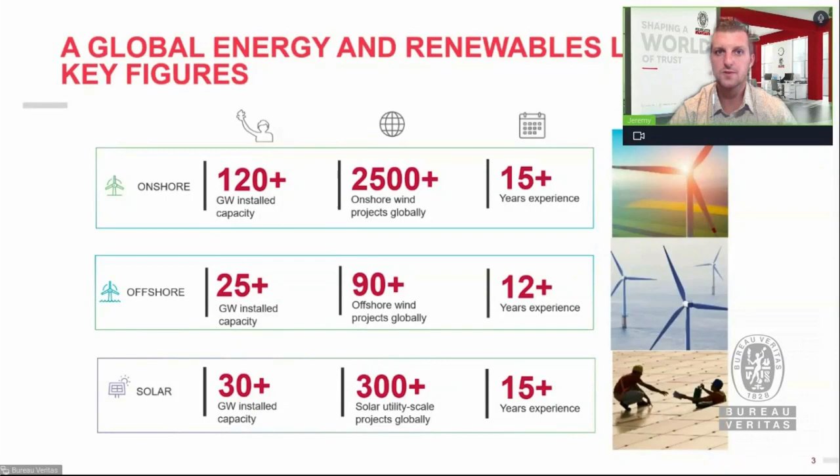As you'll see, we have quite a network of expertise throughout Bureau Veritas within our global reach. The offices supporting the scope we talk of today are located in Houston, but we have a variety of areas that we support and service lines throughout the world, which gives us strength to support projects throughout their life cycle and development across the world.

Regarding the services Bureau Veritas can assist with, we work anywhere from the CapEx side all the way to the OpEx side, which we'll talk about today more, specifically with development support, things like owner engineering, reviewing design on projects, all the way through construction management, overseeing the construction and capital build out of these large projects. We also have a certification group that supports product certification and project certification, along with asset operation and asset management, which today is the main topic that we're going to talk about, supporting optimization of assets that are already in existence.

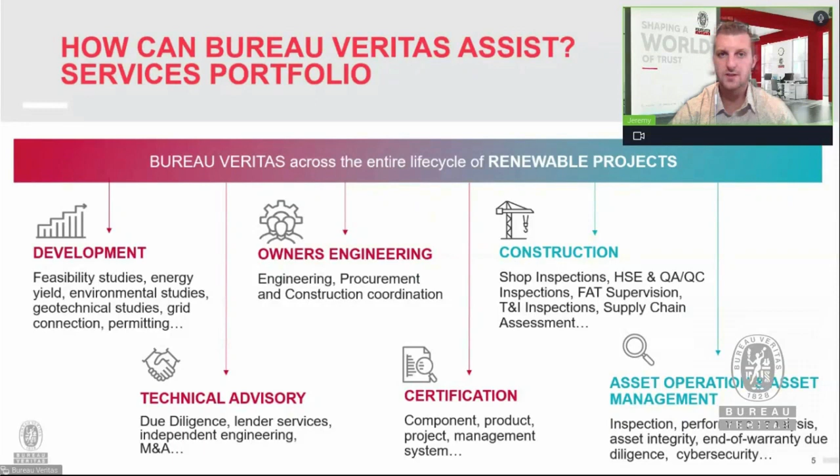So as we jump into the content today, on the agenda we're going to look through 5 different sections. The first section is going to be looking at specific gearbox oil for the wind turbines that are currently deployed in the global reach. We're going to secondarily look at the modes of degradation and then the analytical tools that will help us understand those modes of degradation, and then really drive into some case studies that are specific to these topics, and then come upon some conclusions and have some time for Q&A.

At this point, I'd like to introduce our global expert for our OCM group, which is for oil analysis, which looks after over 20,000 different wind turbines throughout the world. I want to introduce and kick off the topic of technical nature with Jorge Alarcon, and he'll be leading the discussion from here.

Thank you very much, Jeremy. So I've been involved with oil analysis and lubrication in wind turbines since 2008. I saw the transition that the industry had, especially in the size of the turbines and the gearboxes, and also the different types of oils and lubricants that this industry has been using through the years.

There's a large difference between what we were doing when we started oil analysis back in the early 2000s compared to what we're doing right now. Right now we have tons of data, a lot of information, and we've gained a lot of knowledge through that time. So what we're trying to do is not only increase that knowledge, but at the same time offer that expertise to our customers.

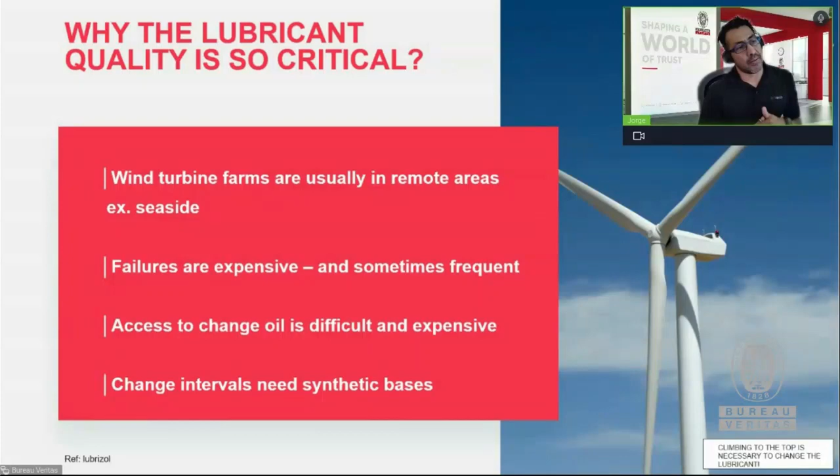So when we talk about gearbox oil, we're talking about very developed technology that we are using in the gearboxes right now. It contains many different types of properties that are trying to basically extend the life and service of the gearbox. If we go back to the initial years of the wind industry...

...the gearbox oil used to be changed every year, and for some reason we started seeing that change a lot over the years. Now we have seen sites that are using the same oil for about almost 18 years in some cases. So we are talking about a technology that has developed through the years at the same time as the power increasing on the turbines.

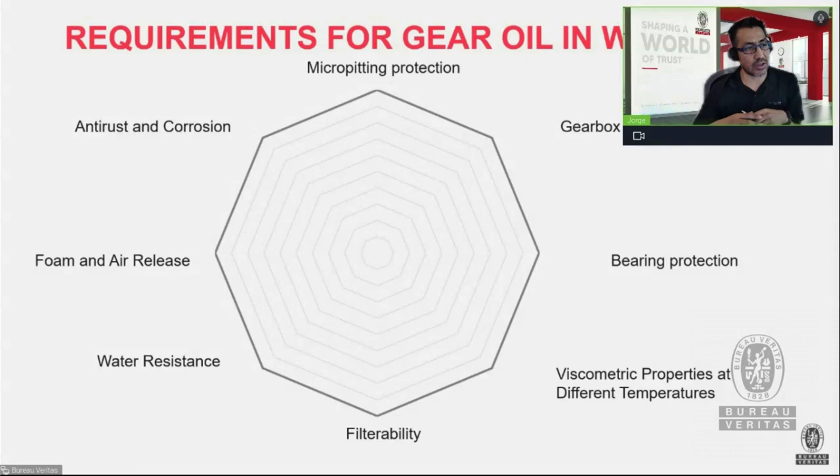If we go back to the initial year, '98, for example, when we started doing the first gearbox oil analysis and grease analysis, we saw that initially around 89% of the oils were mineral oils. If we compare that data with what we have here, we can say that, depending on the country, 74% of the gearboxes are now synthetic.

Especially PAO type oils mixed with an ester type of oil. So the in-service life of the gearbox has changed dramatically. Of course, there's a difference in price, but basically what we are seeing right now is gearboxes using the same type of oil, with just a little bit added through the years, a very low volume added.

But we are seeing turbines that are having the same oil for almost 20 years. And that's especially what the market is demanding, right? So what the market wants is one type of oil that can last longer and try to match the same lifetime as the gearbox.

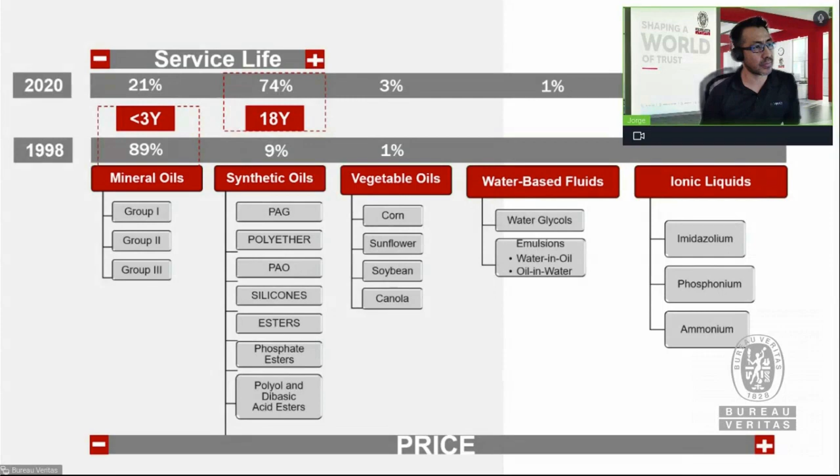So why is it important to control the health of the oil? It's very important, especially not only for the oil, but especially for the components of the gearbox, right? The teeth, the bearings inside of it.

So if we go back to the initial years of this industry, we said that a mineral oil was there for less than 3 years. Now we have synthetics running for more than 10. So the oil failure mode changed dramatically through the years.

So we are not seeing the same type of failure modes that we've seen at the beginning of this industry when we started using mineral oils, but also when the synthetics were added into the gearboxes, the failure modes were completely different than the ones that we have now.

Same thing with additive depletion. For some reason, some additives deplete differently even when we talk about the same technologies, the same type of oil. And exactly the same happened with some other characteristics of the oil, like compatibility, for example.

Now these days, the entire world is shaken because there's probably not enough lubricants in different countries. In some South American countries, for example, it can take about 6 months to get the correct proper lubricant for the wind site. So we are seeing a lot of compatibility problems these days, things that we never saw before in the past.

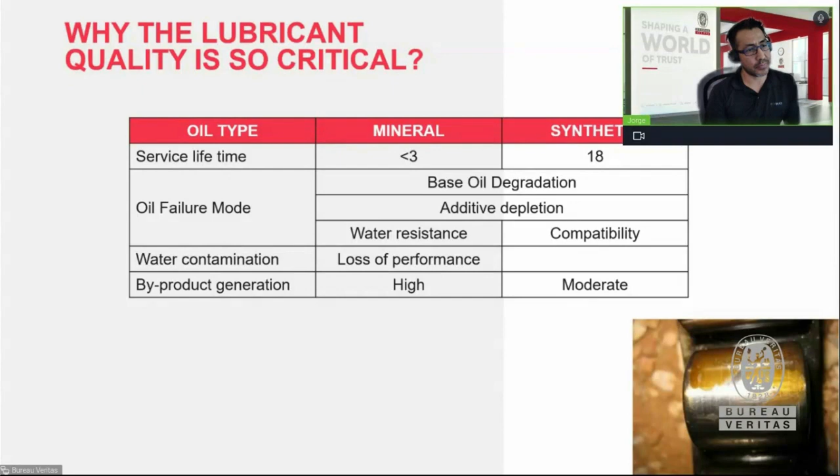So when we talk about oil analysis, we are talking about just a small sample, 4 ounces, no more than that. When we talk about grease analysis, we're talking about less than 20 grams of grease. And after running the entire test package, the customer expectation probably is not what the lab can provide.

Initially, what the lab is providing, or what the lab is telling, is the oil health, the component health, or how the grease is behaving in certain situations.

And on the other hand, what we have is the customer. So the customer wants to know the oil's expected life in one gearbox, for example, or the component reliability, right? So there's a gap between what the lab can provide and what the customer is expecting.

So what we try to do through the years is close this gap. What we are really doing right now is trying to answer that customer question: how long is this oil going to last? About a year, 6 months? That is the main question probably when we talk about oil analysis in this field.

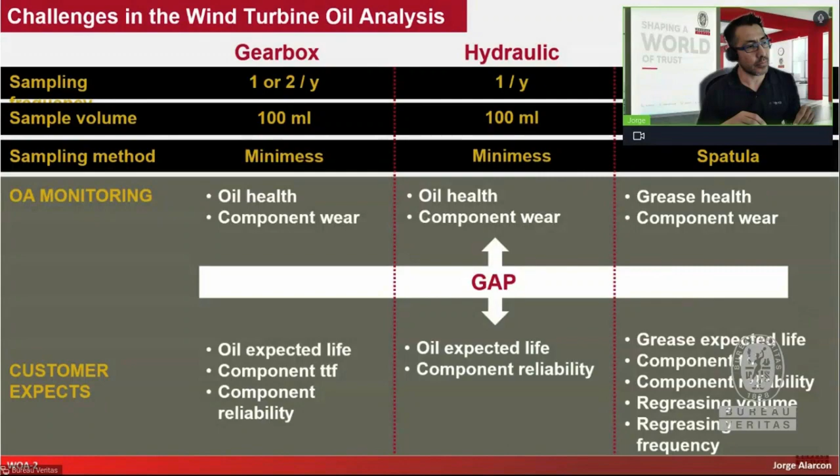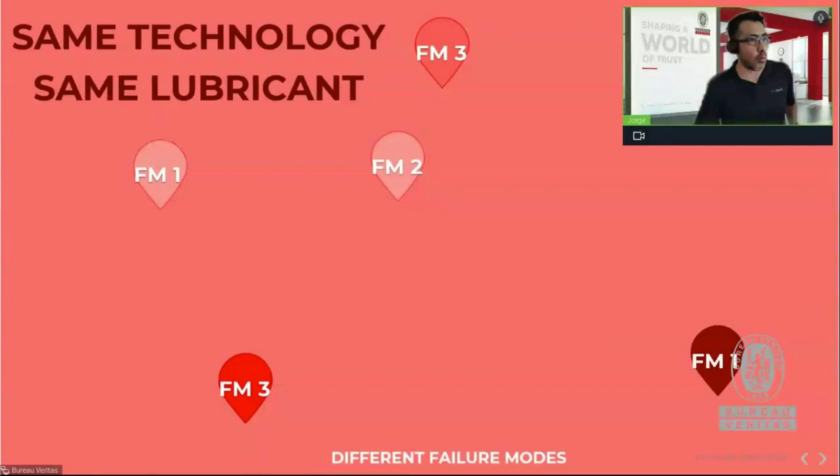So when we talk about the same technology, for example, now a large majority of the turbines are under the same umbrella, right? So we are talking about one OEM, different countries, same technology, and same lubricant in many different situations. So it is important to know that the failure mode of one lubricant in North America is completely different than the failure mode that the same lubricant and technology will have in Europe, or South America, or Australia - different countries.

So what we learn through this time is that we need not only to maintain one specific test package for this industry, but what we need to do is try to look for that specific failure mode. And that will require that we start developing different types of tests. So we need to look for different analysis, trying to understand what's happening with that specific oil. Even though it's the same technology and same lubricant, we probably have a failure mode in Europe which will not be the same failure mode that we have here in North America.

So it's very important to understand what's happening with that specific oil in a specific location. For example, when we talk about viscosity - these 320 oils, very typical for the wind industry, located in one specific location - what we can see is that the failure mode from the viscosity point of view is decreasing viscosity. So basically the hydrocarbon chain is breaking through the years, creating a very low viscosity content in this case. This specific situation doesn't apply for the same type of lubricant in a different zone. So depending on the operations, the environment, and many other factors, what we are seeing is that viscosity, probably the most important physicochemical property in any oil, is not behaving the same way across all sites.

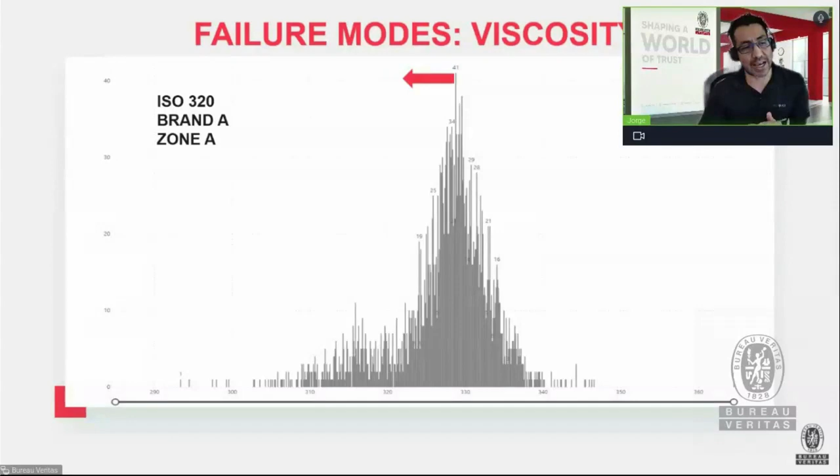And exactly the same when we talk about degradation, right? When we talk about how the gearbox oil degrades, we have many different types of degradation. Like in this case, just a small amount of outliers in this graph that we are seeing are suffering from different types of degradation. But in the majority of these examples, what we can see is that there's no degradation of the oil present in this entire farm - this is one site. So if we compare this type of degradation with a different site in a different location, we will see a completely different picture. So what we are trying to do is understand how the oil degrades, and it degrades in very different ways depending on the location.

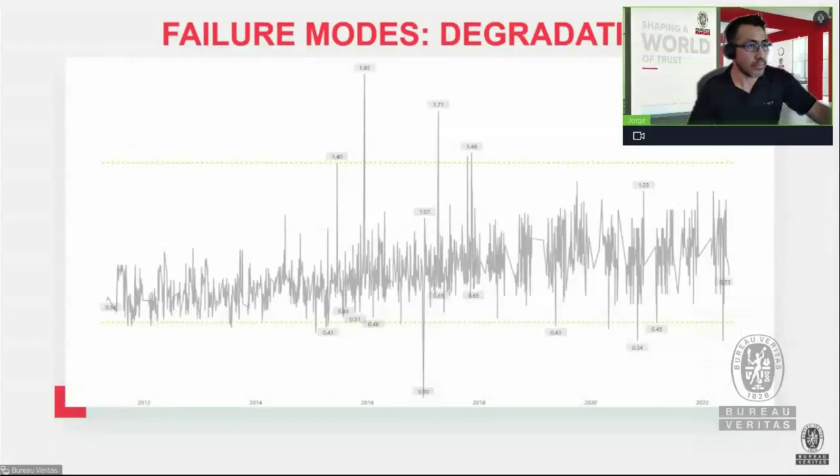And the same thing happens with additive depletion, right? Through the years, we have seen how the lubricant industry has been improving the lubricants used in the wind field. So same thing with additives - we know they are very important, providing the lubrication film when we talk about loads in extreme situations. So we need to understand what's happening with the additives, how they are depleting, and why. Is there something we can do when we find an accelerated depletion of the additives? Those are the questions we are trying to answer for our customers, trying to close the gap that existed initially, mainly due to a lack of knowledge. But after 20 years of running thousands of analyses, we are really close to understanding what's happening with every single type of oil, or at least the majority of oils used in this field.

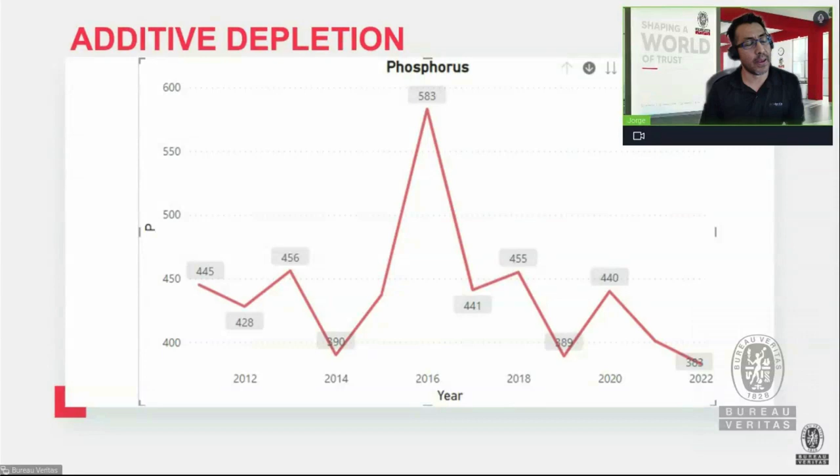So what we are saying is that different failure modes require different types of analytical approach. In this graph, we can see the fingerprint of two different oils in this industry. These two different oils are going to behave and degrade in different ways, so understanding them requires a different type of analytical approach. Basically, we cannot use the same test package for these two types of oils, because either way we're going to lose track of one, or lose how one of these is going to degrade, and that will have an impact on the gearbox, on the availability and reliability of the turbine, which is very important for us. So we are trying to focus on early identification of the problems, early identification of the failure modes based on the different types of oils that are in the field right now.

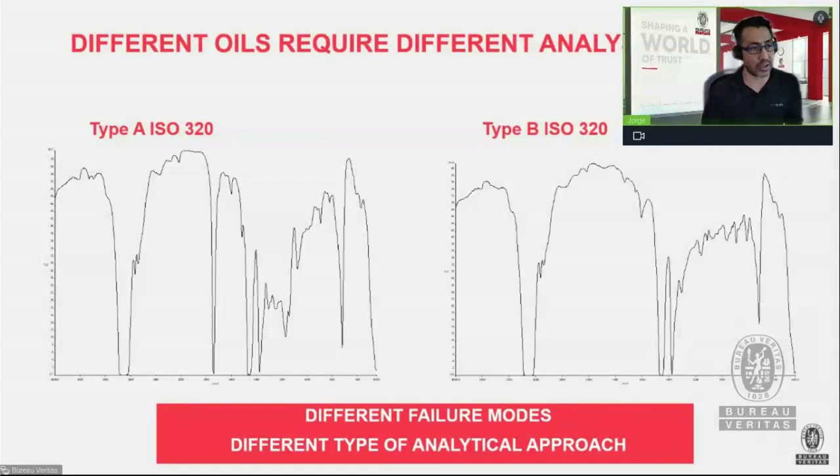So what about fleet limits? A lot of companies work with limits, especially for oil analysis, but unfortunately, oil analysis is not about a fixed limit. Let's take a look at this case study here.

For the last 4 years, around 4 years, this site has been changing the gearbox oil after each sample due to the increasing viscosity. At the same time, they noticed that the filters lost efficiency at around 40 to 50%, depending on the turbine, of their useful life, and the filters had to be replaced.

Also, the oil temperature increased, again depending on the turbine, between 5 to 12 Celsius in the last 2 years. At the same time, the valve that controls the oil flow to the gearbox had to be replaced in probably 20 of these turbines due to the amount of sludge adhering to this valve. We can see how this sludge is in the filter, so the filters need to be replaced because the oil is not flowing properly.

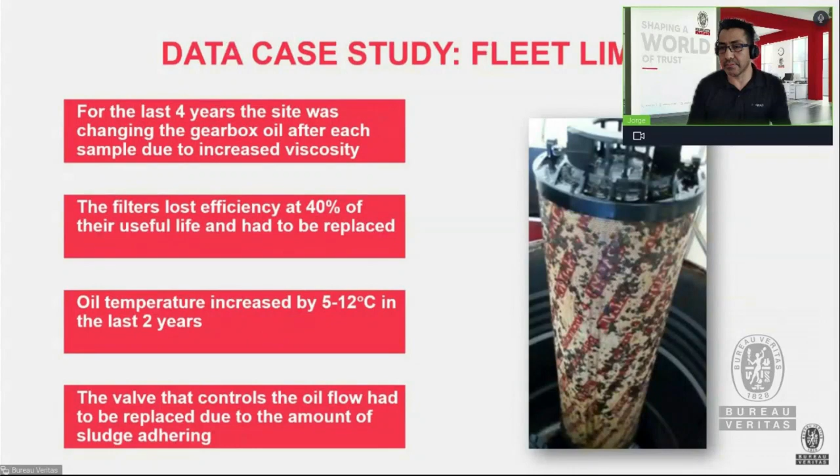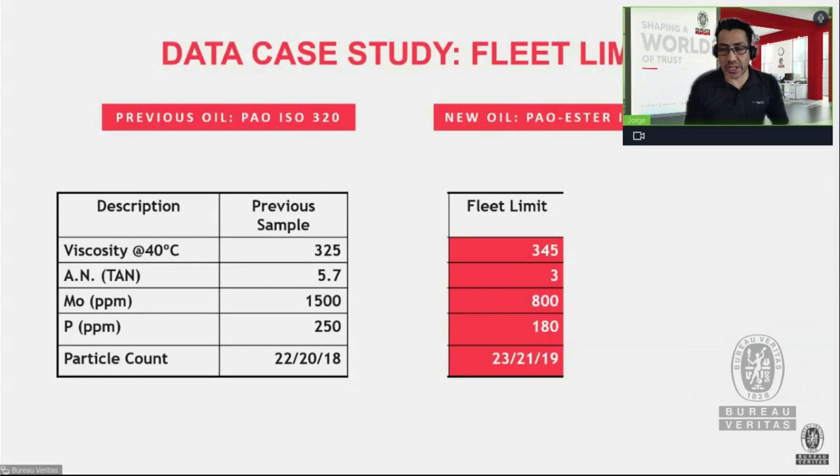If we go to the limits, we will see that the previous sample was under the limits, everything was perfect. But if we take a look, for example, at the particle count, it was very close to the limits. However, the site was having a lot of problems, and we can see how the viscosity was increasing to around 345 to 350, about 5 centistokes above the limit.

So in each situation, the site manager has to decide what to do with the oil - change the oil because the viscosity was over the limit, or change the oil because the acid number in this case was not over the limit, but was under it. So what really happened with the limits?

It was not fixed for the proper oil. Same thing with the additives - the site manager decided to change the oil because the additives were under the limit, right? So what is the situation here? What is happening? That's the most important thing.

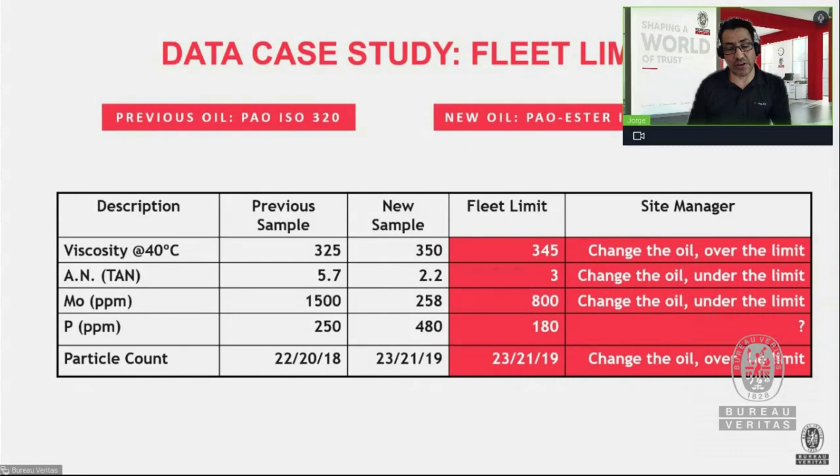A lot of people change the oil. A lot of sites are using different types of oils, and the fleet has never updated their information in the limit system.

So what happened when we have this type of situation, when we are mixing oils? Initially, the additives are the first ones that suffer rapid depletion. Depending on the type of additive, it will start consuming because a chemical reaction is happening inside the gearbox, and the additives are the ones that suffer this reaction first.

There's an incompatibility between the oils that creates this chemical reaction, and maybe it will affect the viscosity. In some cases, the new oil has a different viscosity than the previous oil, so it will just be a compensation on the viscosity. But we shouldn't forget that a chemical reaction in some cases can break the hydrocarbon chain, and that will create a different viscosity, at least for a portion of it.

After the site found this problem and tried to correct the situation - the contamination with the previous oil - after the gearbox was cleaned and flushed, not only drained but flushed, we found out that the previous oil was there in the gearbox for around 3 to 4 years, in a concentration that initially was around 10%, and by the 4th year it was reduced to probably less than 2%.

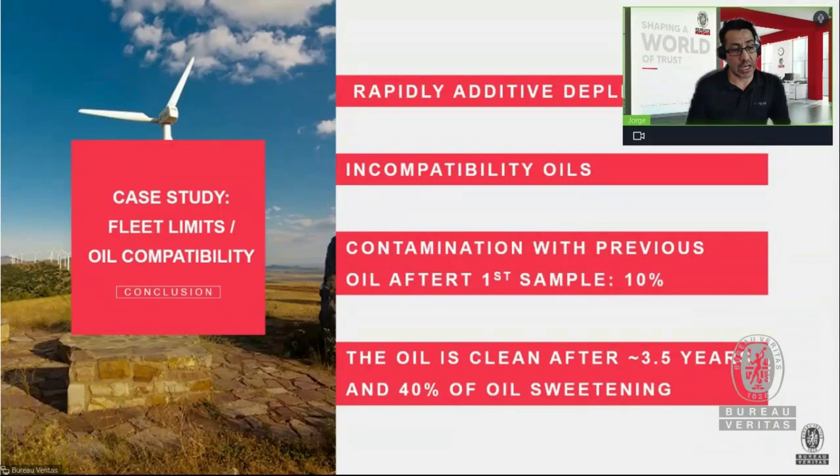So the previous oil, even if the site decided to do a flushing, remained there. Of course, a remainder of the previous oil means that the chemical reaction, if it's a wrong reaction, will probably continue through the years. So in this case, not only cleaning the gearbox, but also over these 4 years, it was necessary to replace or sweeten around 40 to 50% of the amount of oil in the gearbox.

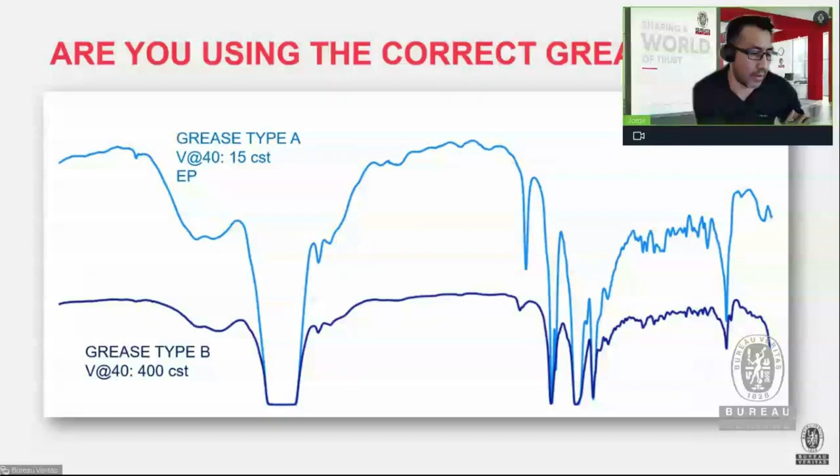And same thing when we talk about grease, right? Especially these days, because of the problems we're having on the logistics side of the chain, a lot of people start mixing greases. Probably it's not a big issue mixing two greases that contain the same type of thickener. But if we take a more in-depth look, we can see that one of these greases has a viscosity of 15 centistokes, and the other has a viscosity of 400 centistokes.

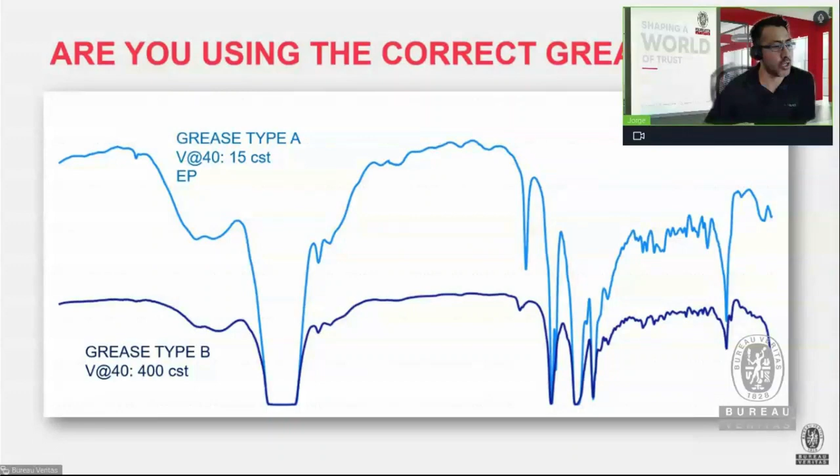Same thing with failure mode. We're not talking about grease analysis or grease failure mode in this case, but about main bearing failures. We can see that two different sites using the same type of technology, the same type of grease, are having a completely different failure mode. So it's very important to try to understand what's happening with the grease when we do a grease analysis, because that grease analysis will lead us to know how the main bearing, or any other bearing, could be the blade bearing for example, is failing.

And if we know that, we can probably take advantage of this situation, and we can, for example, schedule a main bearing replacement very early, or we can do some up-tower tasks to solve the situation instead of waiting until the bearing fails completely.

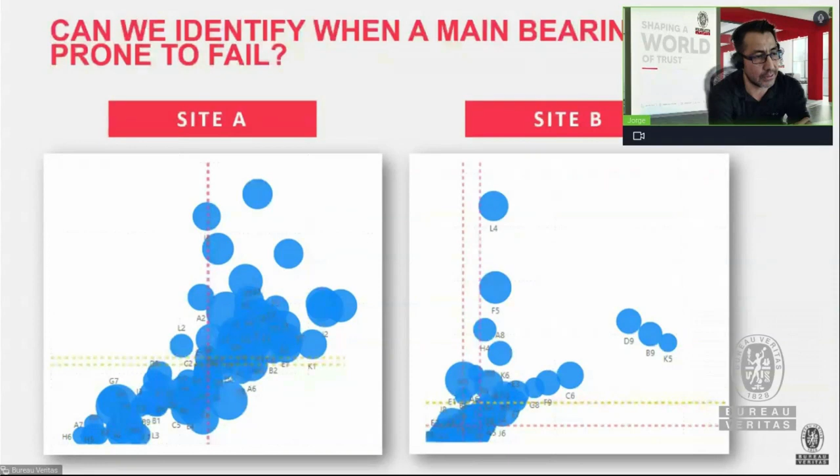A different part of this game has been played by data analytics. All the knowledge we've developed through the years, and all the information we have, tons of information, it is good, it's very important to have, but it's very important to use that information too. So data analytics plays a very important role when we talk about not only failure modes, but trying to understand not only the oil analysis part of the situation, but also the behavior of the components in the wind turbines.

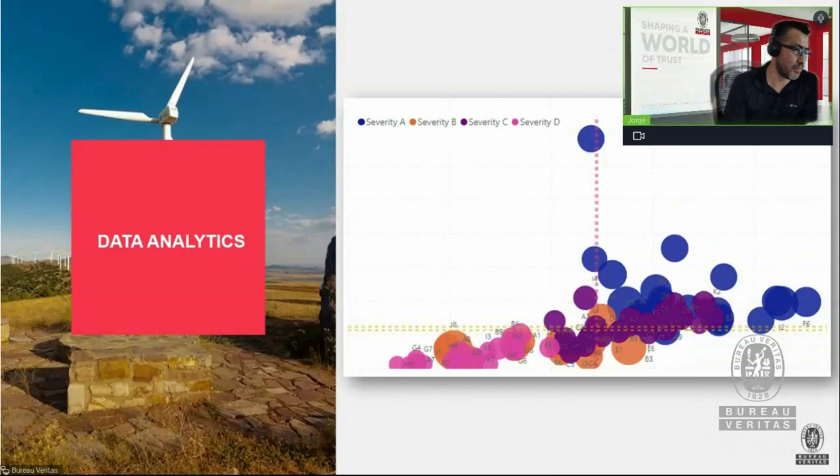A couple of notes here if you are a fleet manager. My recommendation is to try to know the lubricants in each site that you use. Not all lubricants fail in the same way. Knowing the failure mode of each lubricant will improve the turbine availability. And the last one is very important: do you have an oil lubricant analysis specialist or expert on your team? That's probably one of the most important things when we talk about oil analysis in this field.

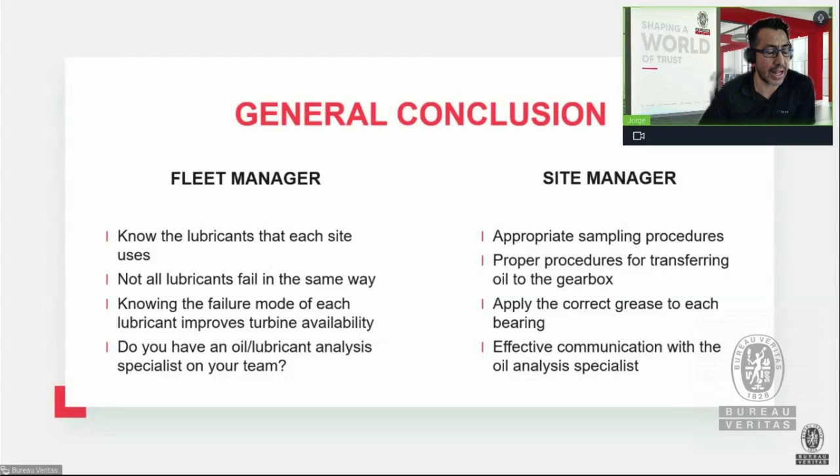And for the site managers, are you using an appropriate sampling procedure? Sampling procedure is probably one of the most important parts of oil analysis. Proper procedures for transferring oil to the gearbox is also very important. I've seen a lot of problems with people transferring not only dirty oil, but already degraded oil into the gearbox. Apply the correct grease to each bearing. As I said before, these days we're seeing a lot of problems with cross-contamination, especially between greases. People think grease is just grease, but as we've seen before, there's more behind that than the thickener. Effective communication either with the lab or with your oil analysis specialist will help you through this area.